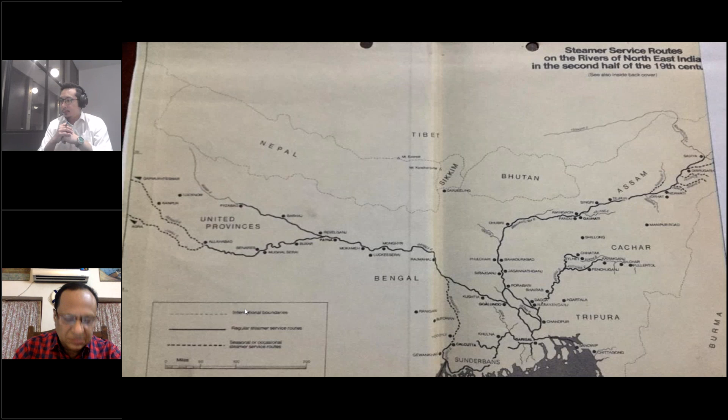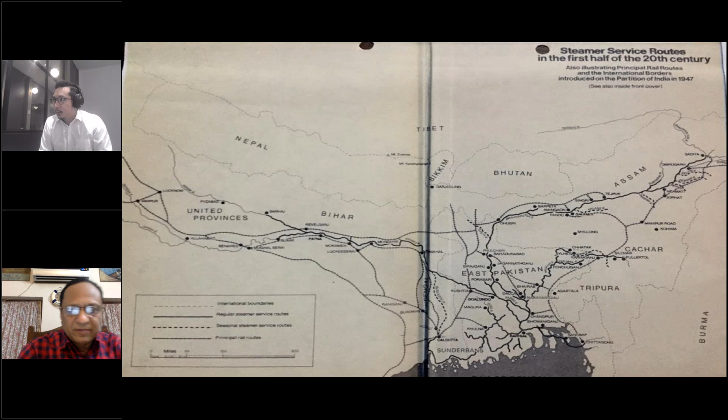Next slide, this is at the time of 1947 when India got independence. Here you can see the creation of East Pakistan, and also the railway lines network that had been laid. Thereafter, East Pakistan became Bangladesh.

In this slide you will see a photocopy of a fleet list of the two largest surviving companies of those times. One is India General Navigation and Railway Company Limited, IGNR, incorporated in 1844 at London. Second is River Steam Navigation Company Limited, incorporated in 1862 in London.

These two companies joined hands when times were not good, in 1899, and then came to be known as the Joint Steamer Companies. Later, in 1967, the Government of India took over and created CIWTC, the Central Inland Water Transport Corporation.

This is a page from the fleet list just to demonstrate. At that time these old companies together had about 1,200 barges and 12,000 men, one of the largest enterprises of its kind in the world, which was the golden period of IWT in India.

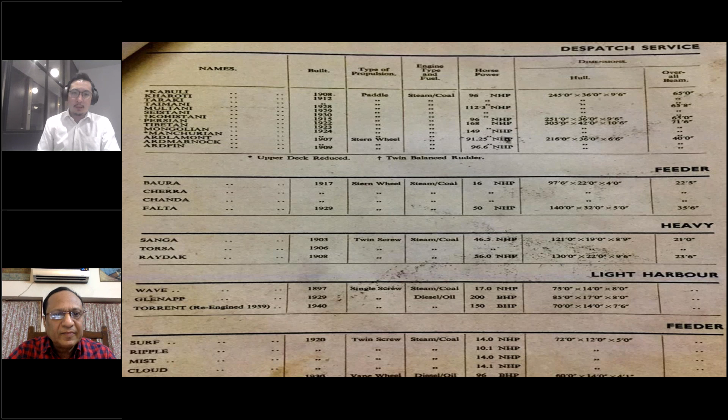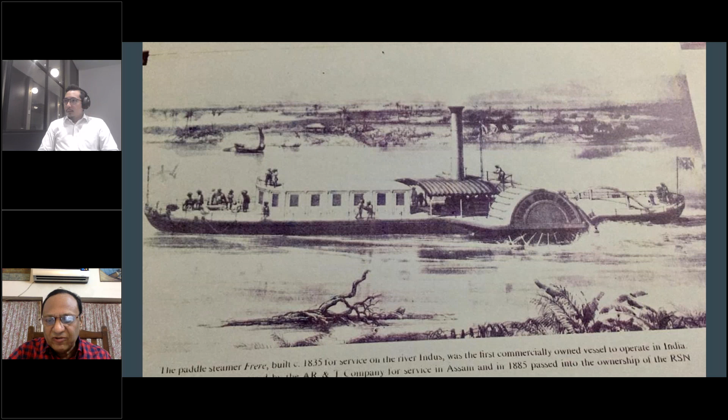This is one picture of a paddle steamer, Frere. It was built in 1835 for services on the river Indus and the Ganges.

It may be interesting to know that the port of Calcutta is a deep inland port about 150 kilometers from Sagar Island, set up in 1870, one year after the setting up of the Raja Bagan Dockyard, which was the IWT yard. Interestingly, if you see a plaque at Singapore port, it is written that they wanted to be like Calcutta port. This is probably the first time ever I have spoken 200 years of history in 2 minutes.

Okay, next, I am coming to this slide. This is the national waterways in India. There are basically 5 national waterways. National waterway number 1, NW1, is on the river Ganges and Yamuna. Number 2 is in Assam, on the river Brahmaputra. In between, Bangladesh is there, and now the waterways are connected also through Bangladesh.

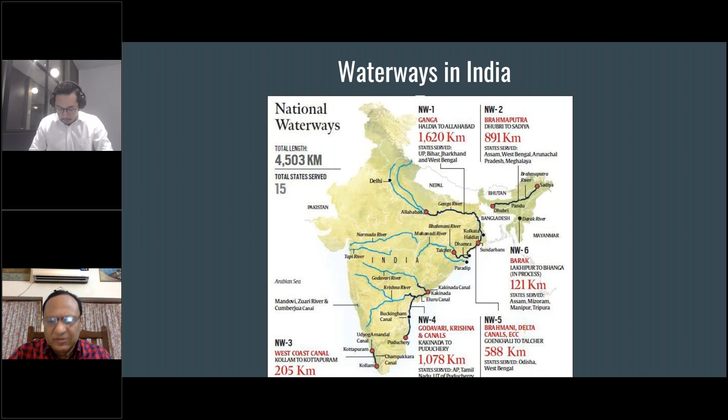Talking about the ports in India, there are 13 ports on the east coast, or maybe 14 — Dhamra is not showing here — and 32 on the western coast. The concentration of ports is mostly in Gujarat, that is the left side of your screen top, where various yard crafts are operating.

These are the tugs, water barges, oil barges, passenger ferries, etc. These yard crafts are designed as IWT vessels, therefore they come in the category of IWT barges. In addition to the above ports, there are two large naval dockyards: one in Visakhapatnam on the east coast, and the second on the west coast in Bombay. Each one has about 125 to 150 yard crafts.

Thereafter, on the waterway slide we have seen, there are passenger ferries and country boats, which are mechanized. I'll come to that later.

There are various acts in India. The first Inland Vessels Act, IV Act, was 1917, thereafter amended up to 2020. Then National Waterways Act 2016 — this act actually, there were five national waterways, and after that 106 have been added; this was only a declaration of waterways to be developed in future. Merchant Shipping Act was made in 1958, and there's also the Coasting Vessels Act. This is all related to IWT vessels and ships.

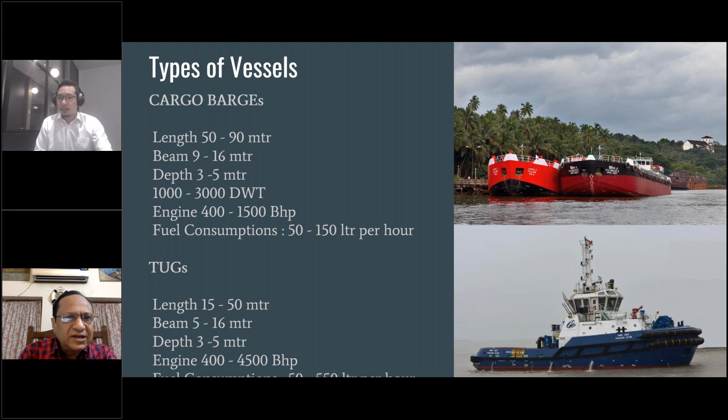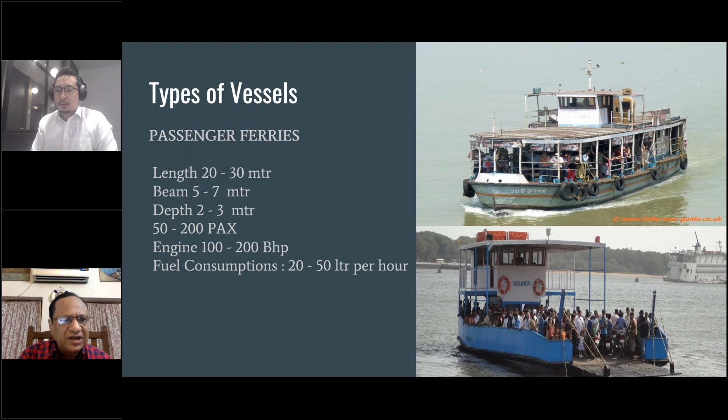So is Gujarat - there are various ports there: Kandla, Mundra, Jamnagar, Dahej, etc. Also in Maharashtra, Bombay, Ratnagiri, and other places we have seen. In Kerala, there is National Waterway number 3, but cargo barges are very few. Tugs are there, and passenger crafts are many, maybe more.

In Andhra Pradesh on the Godavari River, cargo barges as such - I don't think there is anything significant. There are a few tugs, and passenger crafts are mostly operating. These passenger crafts operate in the entire stretch of the rivers.

West Bengal has a large number of cargo barges. Initially they were small in number, and were also tug and barge combinations - two barges, 750 into 2, towed with a tug. Tugs are there in the port as well as the IWT sector, and passenger craft ferries, which I have shown as is.

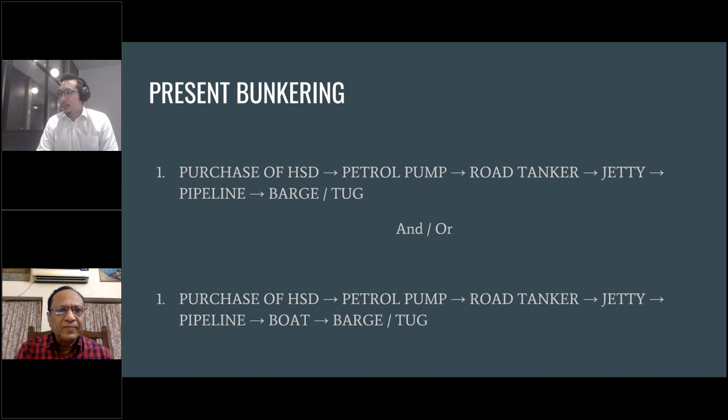Now this is another major area - major fishing harbors in India. There are a very large number of fishing harbors. There are 5 or maybe more - I'm talking about the large ones.

Total about 42 fishing harbors are there in 9 states, 4 on the east coast and 5 on the west coast. And a total fleet of about 200,000 fishing trawlers are there, from very small to good capacity, because they consume a lot of HSD all the time. They go to the ocean a couple of miles and then they catch the fish, school of fish.

Okay, my presentation does not end here. I will talk about a few points on methanol, though everybody is more knowledgeable than me because I am only talking about the IWT sector. But whatever little I know, I would like to share with the other participants who may not be knowing, or maybe knowing even. I'll just go through.

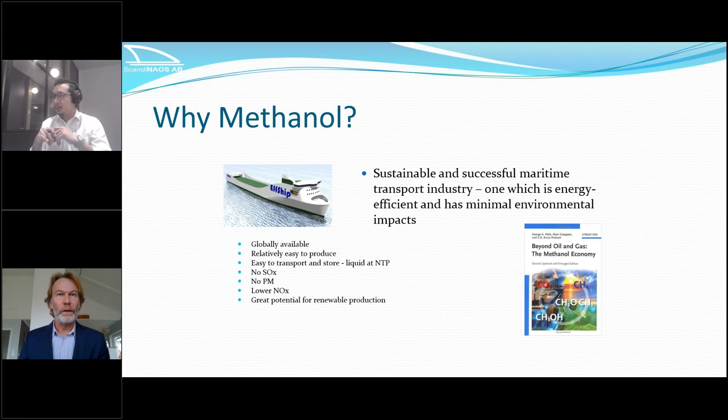Can we change slide there? Yeah, there we go. So I'm not going as far back as the 1800s, but we started this in 2009 with the EffShip project, and since then we've been involved in a number of projects.

In the EffShip project we had good partners at Stena and Stena Line, Lloyd's Register were there, and a number of other relevant companies. They shared our interest in methanol, and we then made some consecutive projects together with Stena. The first was the Stena Scanrail, where we tested some ideas, and that eventually brought us to the more significant conversion of Stena Germanica.

Stena Germanica at the time was the second largest RoPax vessel in the world, and we made that conversion starting in 2013, completed in 2015, where all the main engines were converted to methanol operation. At the time, Methanex also saw the benefits of this, and at a similar time they ordered a number of product tankers that would also operate on methanol.

The oil price has seen a lot of development - up to 2013 we had quite high oil prices. Unfortunately, I must say, oil prices dropped, which reduced interest in commercial applications for methanol. So instead of looking for the big commercial operators, we looked into the government and municipal-funded operations like road ferries and pilot boats, where we could see they need to be the driver to move into this more environmental and climate friendly fuel.

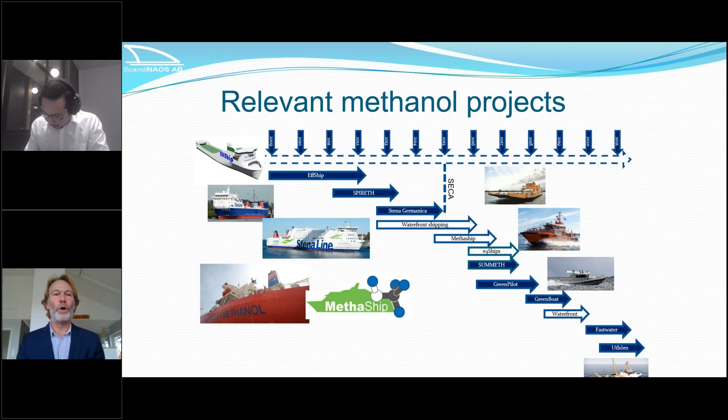So these are the projects we have done, and I'm happy to say we also now have a good portfolio of ongoing and future projects within Fastwater, which I think Sebastian will talk more about, and this Uthöm project, which I will get back to. Okay, next slide please.

This is the Stena Germanica. For this size of vessel, we are the naval architect, so we did everything except the engine conversion.

When it comes to methanol, it's a different fuel with different characteristics from fuel oil, so you have to do design changes or adoptions in order to take care of the specific characteristics of methanol. We have to have another type of fuel tanks. We cannot use the location of oil fuel tanks, but we can use ballast tanks for methanol. We need to have a separate pump room, and we need double wall piping. These are some of the details we have to take care of.

This is the first of a kind, so there was quite a lot of investigation into how to do it. It's not very complicated - if you know what you're doing, you can find solutions to this quite efficiently. The engine itself was a 4-stroke Wärtsilä engine, and Wärtsilä did that conversion.

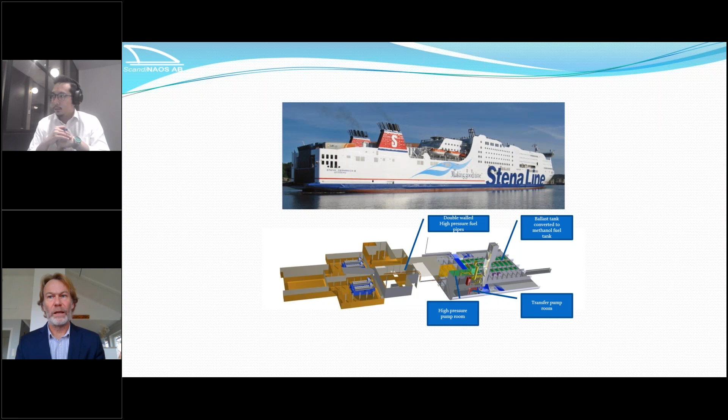This is the 4-stroke engine that Wärtsilä converted, the S40 engine, and methanol has different combustion characteristics than oil fuel.

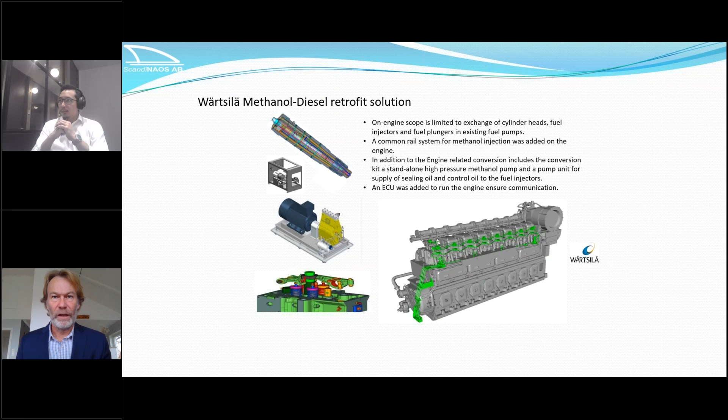It doesn't compression ignite as easily. It's more like an Otto fuel where you need some help to ignite it. There are different ways to do this - pilot fuel is one way, and introducing pilot fuel could be done in different ways. Wärtsilä has a very clever, ingenious fuel valve where you actually have both the methanol and the pilot fuel, or diesel fuel, in the same valve. So the conversion of the engine in principle meant we kept the diesel fuel system and added a common rail methanol fuel system, then combined the fuels in this fuel injector valve. A very nice way to do it.

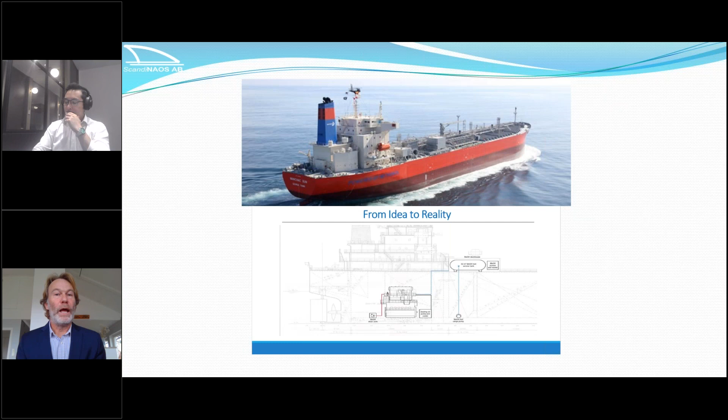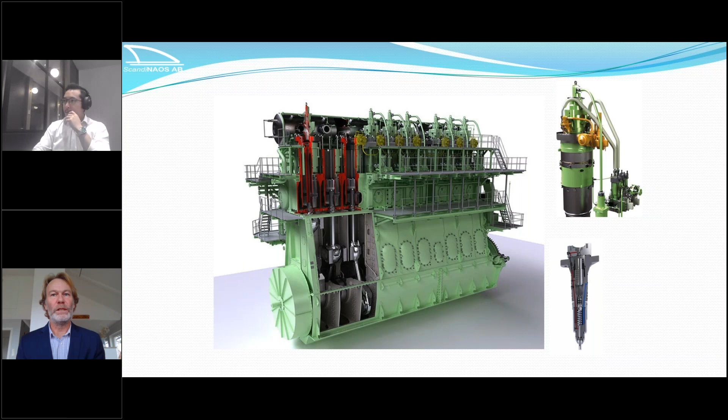Another concept for larger vessels is the 2-stroke engine, like the Methanex-ordered product tankers, where MAN delivered the methanol engine - a similar concept where you have both methanol and diesel combined in combustion in the cylinder. But the difference is, for a 2-stroke engine you have quite large cylinder heads, which means you can have separate injectors for the methanol and for the oil or diesel fuel, which makes things a little simpler in one way, or more complicated.

This engine is now ordered, it's in the brochure in the portfolio, and I think at this point 11 have been delivered and another 6 at least have been ordered for product tankers that would operate on methanol or diesel fuel.

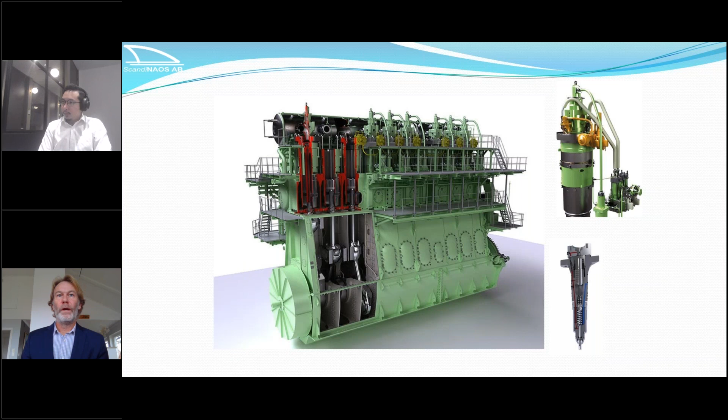From the Swedish Maritime Administration, we got this pilot boat - it's an aluminium vessel with 2 Cummins engines totaling over 1,000 horsepower. We executed that project where we tested methanol engines in this vessel. In principle, we replaced one of the diesel engines with a methanol engine. We tested 2 different types.

When you change fuel, you have to consider the characteristics of methanol. One key thing is that the flash point is 11 degrees, whereas normal marine fuel has a flash point of at least 60 degrees, and all the rules are shaped and set up for fuel with a flash point of 60 degrees or higher. So at 11 degrees, we have to do something. However, 11 degrees is not extremely low - we can compare it to gasoline, which is minus 40 degrees, and LNG at minus 188 degrees. So by opening up for LNG, we open up for all other kinds of low flash point fuel.

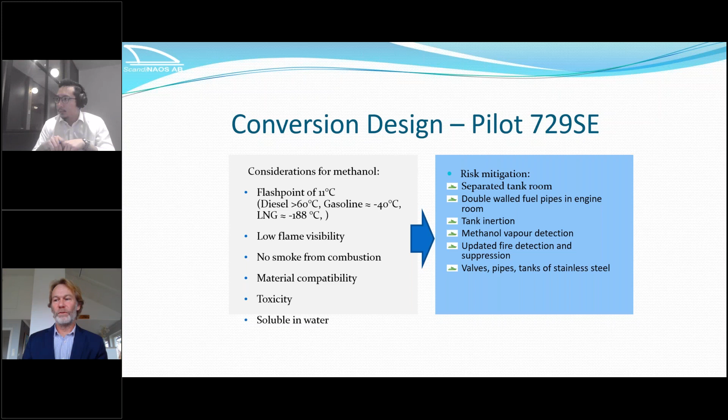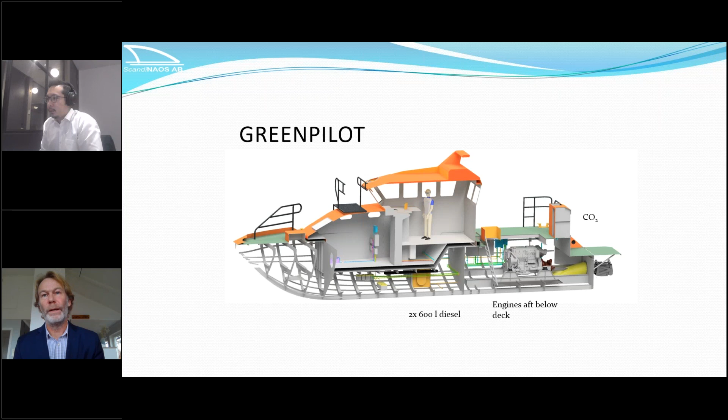So this is the Green Pilot. If you cut it in half, as it looked before we started to convert it, we have 2 times 600 liter diesel tanks, one engine each on starboard and port side, and a fire suppression system of carbon dioxide.

So what we did in this ship: we put in 2 new methanol tanks in a separate, gas-tight tank room. We fitted a gas-tight pump chest in the engine room with the filters and valves. We fitted double wall piping for the fuel piping all the way to the engine. We have gas sensors for leak detection, and a tank inertion system with an inert gas bottle on deck.

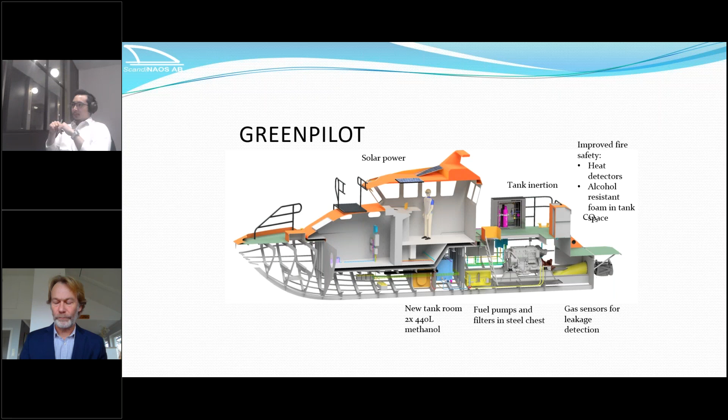For improved fire safety, we added heat detectors, and for the foam fire suppression system we had to replace the ordinary foam with alcohol-resistant foam. This is all straightforward, and if we take care of it, it's a very minor additional cost, I would say.

On deck, we added a dry disconnect bunker connection, meaning we will not have any spill. We have a pressurized fuel tank, so we need a PV valve. And as mentioned, we have a CO2 system which was actually oversized, so we could use the existing system.

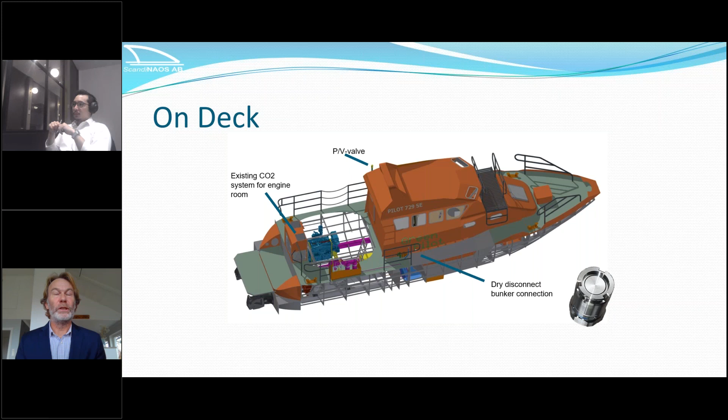Otherwise, comparing to diesel fires, to suppress a methanol fire you have to use more CO2, so you have to upgrade that system.

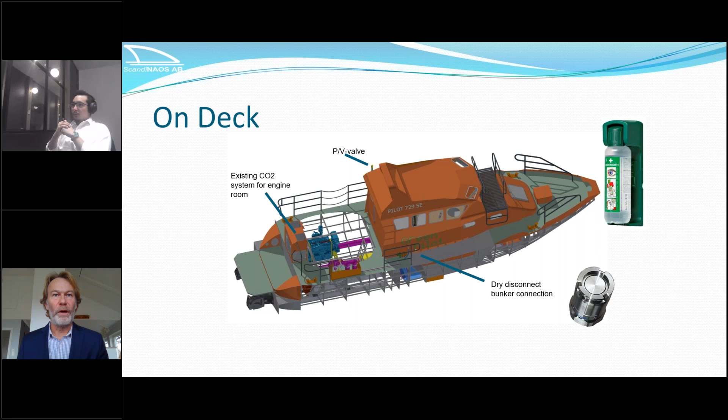There are some minor things, like an eye wash station, whenever you have methanol, because you have to consider the chance of a spray of methanol getting in the eyes. It's important to clean it as soon as possible.

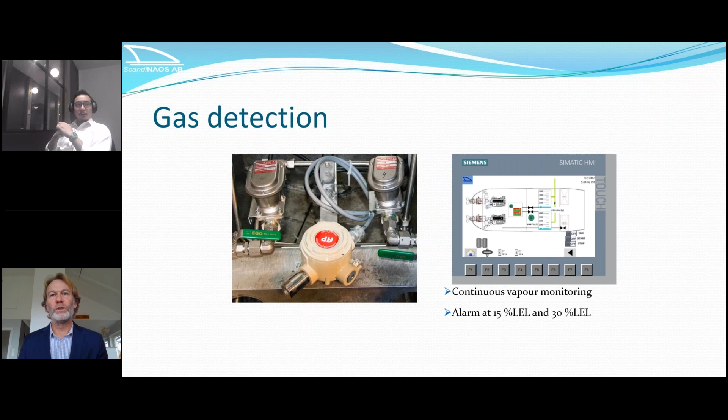Gas detection is one of the things we put in. It's quite straightforward and also a very good way to identify any leakages. In addition to the engine and piping system and inert gas, we provided a control system, including gas detection and all the controls with valves and fuel tanks in the ship.

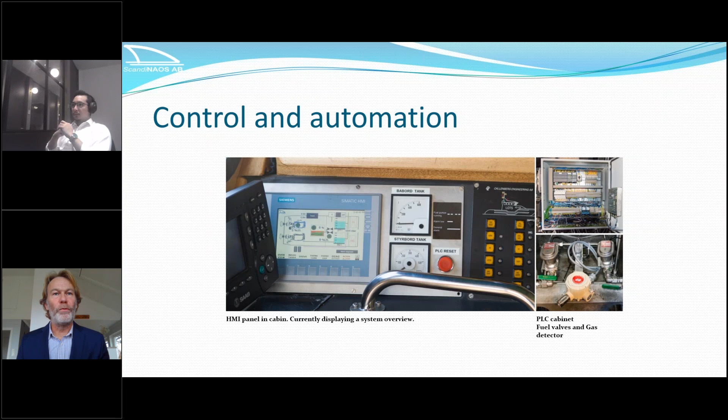So this was the scope of the Green Pilot vessel. It's a great project, and our experience is that everything works very well. We didn't actually have any problems with any of the systems.

We could realize that in certain conditions we have lower noise from methanol. We feel we took good care of material compatibility by providing the right quality for the piping and for the polymers and plastics. We had to replace some of the sealings, but we know where that is and can take care of it, so we don't see that as a problem.

We know it's easy to detect methanol leakage with a gas detection system. We came up with a simple bunker solution that worked really well. We don't actually see that an inert gas system is needed on this size of vessel. We have it on larger installations, but we think that's over-engineering. In this size, with small, limited volume tanks, we should not need a nitrogen inert gas system.

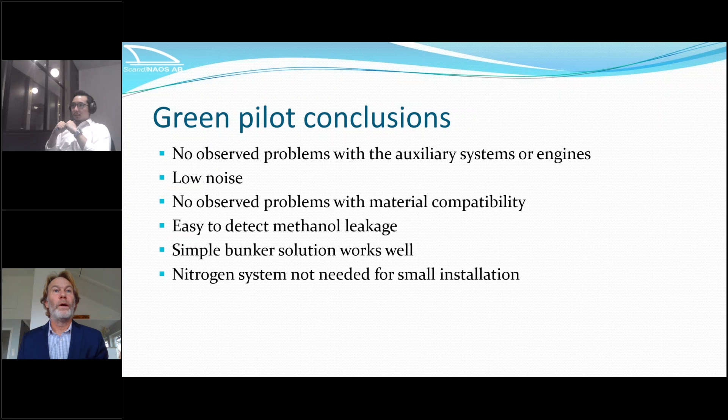So comparing what we did, let's compare two different engines. As mentioned before, methanol is an Otto fuel and works well with spark ignition engines, so that's the first engine we tested. We have good experience from that, and actually quite good fuel efficiency we could prove, but that's at high power output.

We also installed a compression ignited methanol engine. The way to make methanol compression ignite is to add an ignition improver and increase the compression ratio. So we took a Scania marine diesel engine and made those changes: changed the pistons, changed the injectors, and changed the control system.

This compression ignited methanol engine is really the one we prefer, because you have very good driving performance, identical to a diesel engine, and high efficiency both on high loads and on part loads.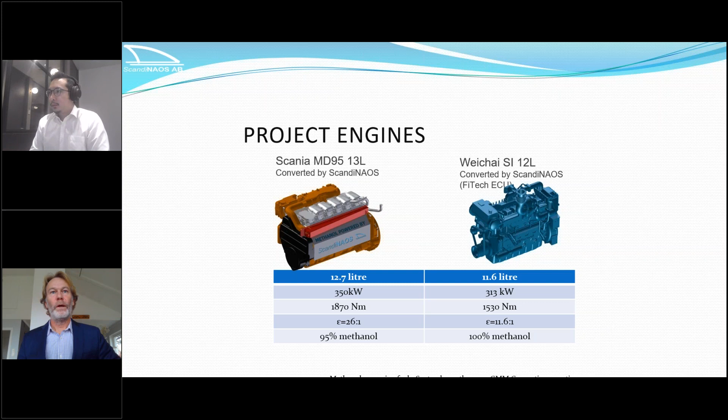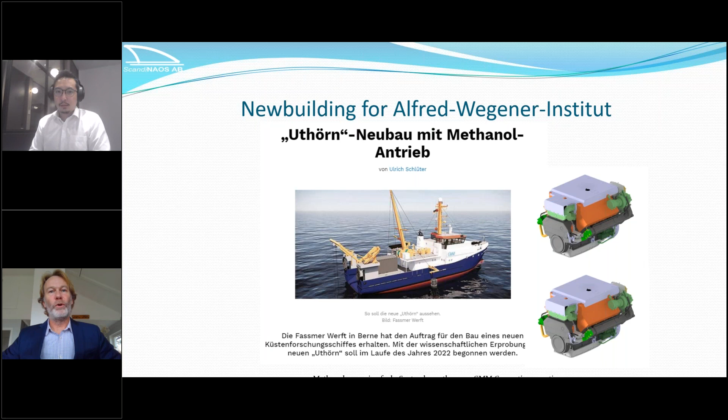All this experience we got both from the green pilot vessel, we are now putting into this Uthörn. It's a German research vessel from the Alfred Wegener Institute, ordered by the Alfred Wegener Institute, will be built at Fassmer shipyard, and will be fitted with two V8 Scania converted methanol engines.

When it comes to what we have seen and done in India, we have actually been involved quite heavily, and we have far developed projects together with Indian authorities, with the Niti Aayog, with the Inland Waterways Authority of India, and together with Cochin Shipyard, plans to have demonstrators to show the benefits of methanol.

We acknowledge that there is a push in India to change to methanol for transportation fuel in all transport sectors, and we can see that we can contribute in the marine sector, particularly for the inland waterways, where we understand the ambition is to increase utilization. I think now they contribute 3% of the total transport work, and the target is 15%. That would mean a lot of new inland waterway vessels will need to be ordered and built, and that of course should be done with a clean fuel that could be domestically produced in India.

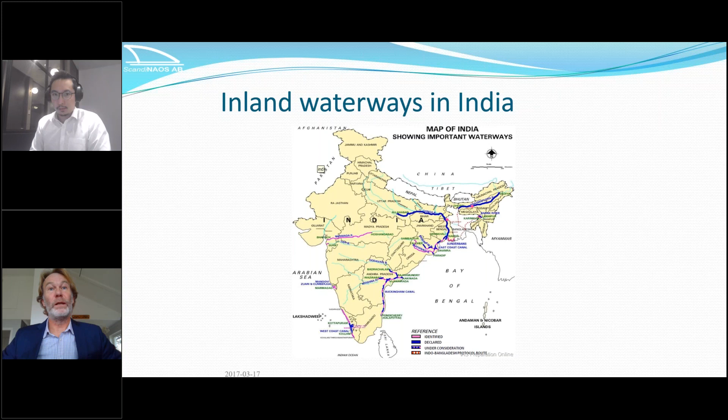This is the type of vessel where we see that we can provide both the design, the system design, and also the engines. So what we now have in our portfolio is the Scania brand. We have the Scania portfolio of engines from 175 kilowatts up to the V8 that gives 450 kilowatts, and we can deliver those both as propulsion engine and genset engines. And if you hurry up, I think we can squeeze in the order and get you an engine before Christmas.

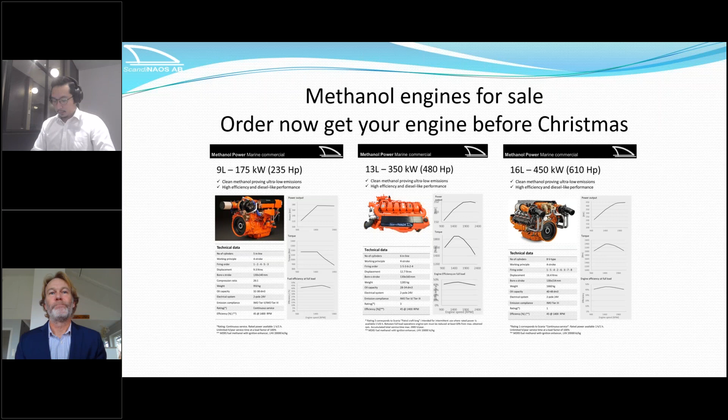And with that, I say thank you very much for your attention.

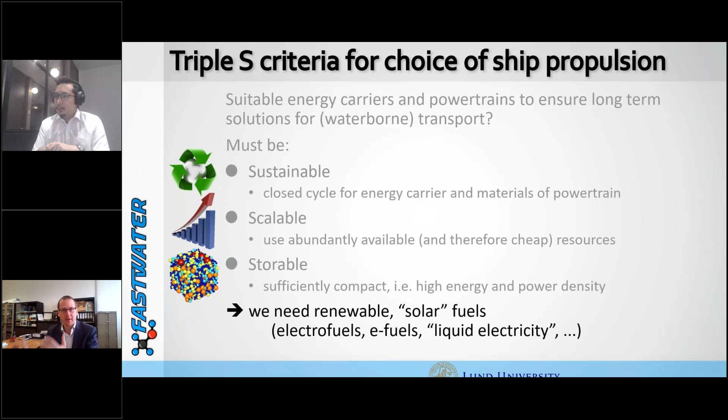So if you combine these 3 criteria, I believe a very logical conclusion, first of all, is that we will always have a need for fuels. Whereas, for instance, for passenger cars, maybe we can go a long way with electrification, for something like waterborne transport, we really need the energy density of fuels. So that's a given. And where do those fuels have to come from in the end? Of course, in the long run, we must be able to make them in a renewable way. So you could call them solar fuels or e-fuels, electrofuels, whatever you want. We have to go from renewables such as wind and solar and bio into something that we can use actually to power our fleets out there.

So this is sort of the summary of the project core idea of the FASTWATER project. This idea that we can produce methanol in the long run, starting from renewably produced hydrogen. So where we start from a renewable electricity form, whether it comes from solar or from wind, for instance, that we electrolyze water so that we can store the electricity when we have an abundance of renewable energy sources in the form of hydrogen, because that's easier to store than renewable electricity. But it's still a difficult thing to store, hence the necessary additional step to something that makes it liquid at normal temperature and pressure.

So basically, the way I always explain this, why methanol? Because it's just the simplest thing that you can make that is liquid at atmospheric conditions. So it's a carrier, or something to carry around hydrogen. And the most compact way of doing that is by actually having a carbon bond in there. So that's the important bit.

Sometimes people criticize methanol by saying, well, there's carbon in there, we have to get rid of carbon. No, we don't want to get rid of carbon. We want to get rid of adding additional carbon to the atmosphere. So as long as we set up net zero carbon emissions, then we're in the clear. And having a carbon bond in there greatly helps with energy density, with ending up with a very practical fuel, a fuel that can then be used to power marine transportation.

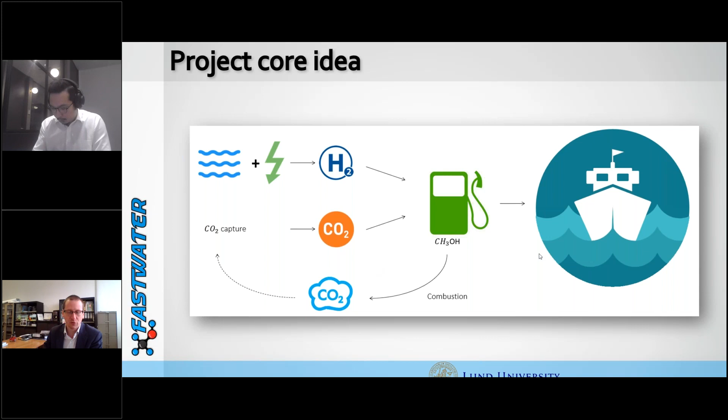So as already mentioned by Bengt, there's been quite a lot of experience by now with methanol as a marine fuel. And at the onset, when we were writing this project proposal, we studied what was already out there to try to understand what are the remaining bottlenecks.

There are actually three main challenges that we want to tackle by the project. The first one, very practically, is the availability of engines. We heard the Stena Germanica mentioned, so that has a medium speed engine, but that's not a commercially available engine currently. The only commercially available engines when we started writing the project were the huge two-stroke engines by MAN, which is absolutely great that they're out there, but of course they can only be used for really big ships.

We have many more applications in waterborne, so what we were looking for was the power range between 100 kilowatts to 10 megawatts. That covers a huge amount of applications in waterborne, and that's where we wanted to work on engine technology and on getting these things into the markets. We'll come back to that in a minute.

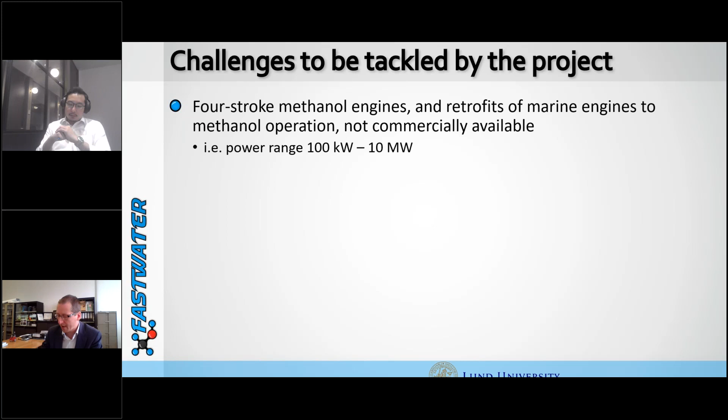The second point was that in the long run, we need to make sure that we land with renewable methanol. It's also very necessary to demonstrate this full chain, from producing renewable methanol up to distributing it, being able to bunker it on board ships, and then ships actually sailing on this renewable methanol. So that was a second point of attention - can we demonstrate this entire chain?

And then a third point, also really important, of course, these things need to be approved. So you have to look into rules and regulations that you have to tackle before you can actually not just demonstrate, but definitely commercialize these solutions. And so there are some rules and regulations out there.

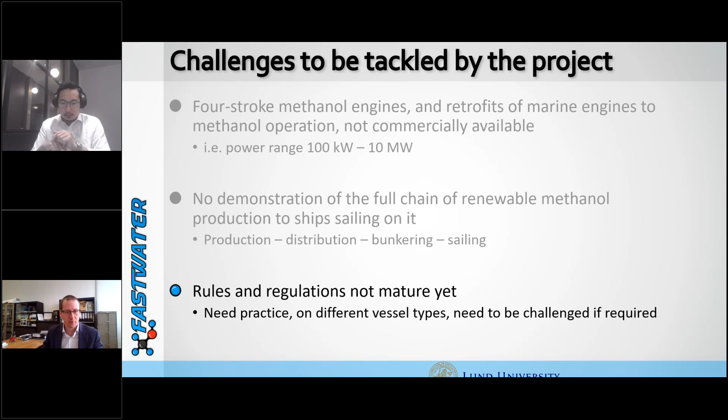Mostly they have been based on LNG, for instance, which just makes life a bit difficult now, not undoable. It's perfectly doable, but we had the feeling some things are probably way too strict for methanol, and we could make life a bit easier, lower the thresholds for people trying out methanol by challenging some of these overly strict rules. So that's also something that we want to check during the project, if there's any possibility to simplify procedures.

So how are we going to address these challenges? First point, availability of engines - here you see three of the engines that we're targeting within this project. The big picture shows a medium speed engine from Anglo-Belgian Corporation, a small ship engine manufacturer. They're going to commercialize a dual fuel version of this engine.

So the bulk of the energy is produced by methanol, with the methanol being injected into the ports, the intake ports, so that we can also devise retrofit solutions, and then being ignited by a pilot of diesel fuel. At the top right is a Scania engine.

So what Bengt from ScandiNAOS was just explaining, this MD95 concept, where you have a single fuel solution, methanol with ignition enhancer mixed into it, that you can use in a pure compression ignition solution. So that's, as you've just heard, also being commercialized.

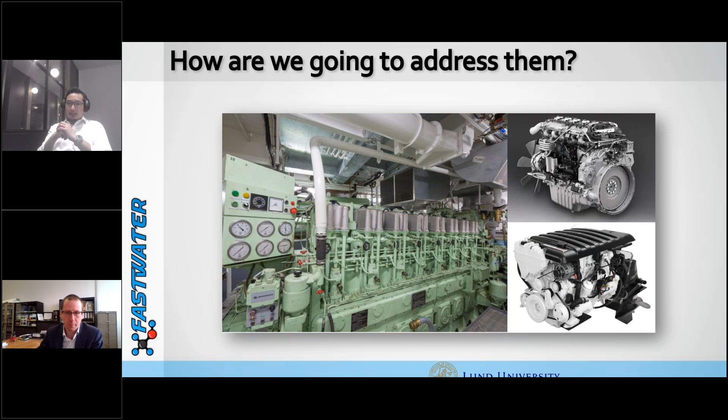And then at the bottom right is a smaller size, 200 kilowatt high-speed engine, a Mercury engine that's going to be retrofitted with a dual fuel retrofit system, because that's one of the things that we also clearly want to demonstrate - that existing ships can be retrofitted to methanol operation. There's a huge amount of ships out there, so if we can make those green, if we can make those less polluting, that's one of the ways to go.

The other part, the demonstration of the whole chain of renewable methanol production to its use as a marine fuel, as well as challenging the rules and regulations, we felt that the best way to tackle those is to have some real life demonstrators out there.

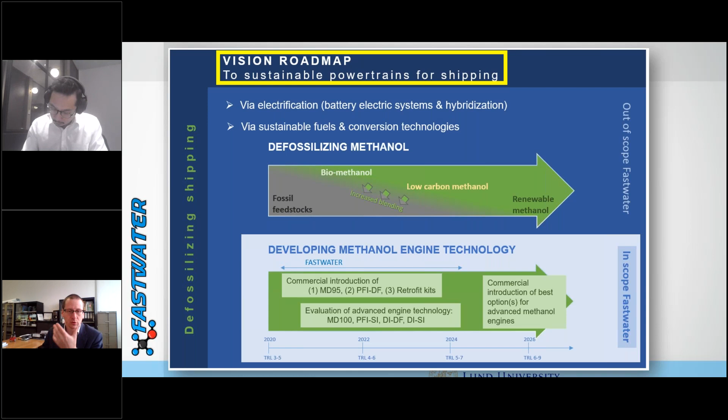So how has this been translated into the general long-term strategy that we envisage? First of all, what we're setting out to do is defossilize shipping, and what we're mostly focusing on is these demonstrators. That also means a number of things are out of scope of the FastWater project, like electrification or other fuels.

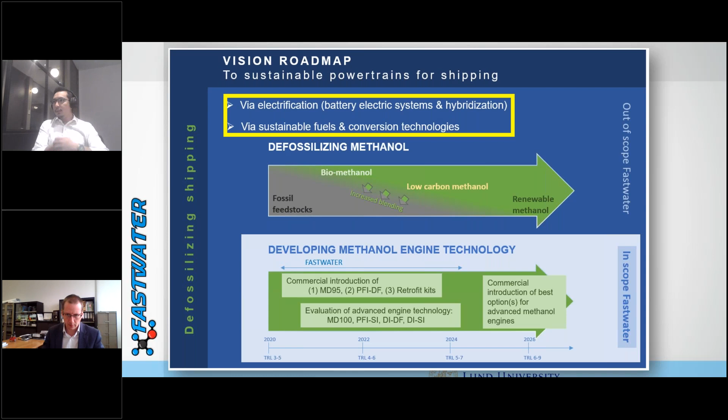What we want to focus on is methanol. We won't do any work directly ourselves on methanol production, but I'll explain in a minute how we make sure we have that link to what is going on with methanol production.

What we want to demonstrate is this pathway from methanol currently mostly being based on fossil feedstocks, natural gas or coal, depending on where you are, with biomethanol slowly becoming available. We see demonstration projects and pilot plants set up to produce low carbon methanol, starting from renewably produced hydrogen combined with a waste stream with carbon content, such as exhaust stacks from a power plant, eventually leading to renewable methanol.

The great thing is that renewable methanol and fossil-based methanol are exactly the same molecule, so we can blend these and increase the share of green methanol in the fuel pool. At the heart of our project is tackling this first challenge of developing methanol engine technology.

On one hand we have demonstrators geared at demonstrating relatively easy technology to introduce, so we can come to a commercial introduction. We've talked about MD95, and dual fuel technology using port fuel injection so we can commercialize retrofit kits. In parallel, we're supporting that work with a more research-oriented work package looking into advanced engine technologies.

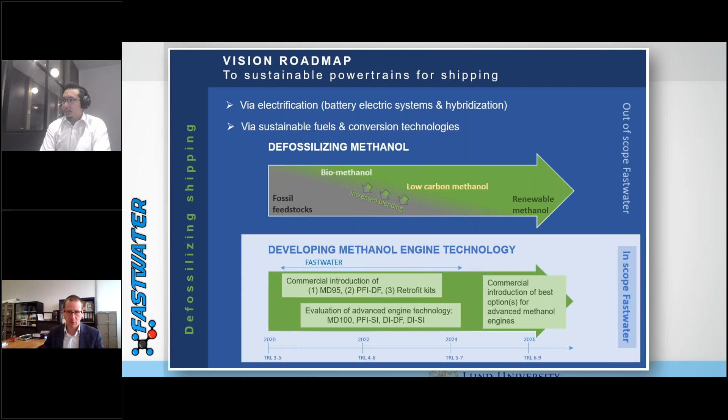Where is this going to lead us to? So the way we've organized the project is shown here - the overall work package structure. The core of the project is these demonstrators: the harbor tug in Belgium, the pilot boat in Sweden, the Coast Guard vessel in Greece, and the river cruise ship concept by a German shipyard. I'll name the partners in a minute.

These are relying on methanol engine solutions, so there we will make sure we have commercial introductions and can offer retrofit packages. Next to engines, there's a lot of other things to organize - we need to take care of fuel logistics, look into standards, acknowledge safety differences with these fuels compared to today, and work on training packages for both onshore and ship crew.

We're supporting that with a work package on next generation engines - what do we learn from the experience gathered during the demonstrations that leads us to the next type of engines making even better use of methanol's properties. And at the end, we want to make a real business out of this - our industrial partners see a lot of potential here in methanol as a marine fuel.

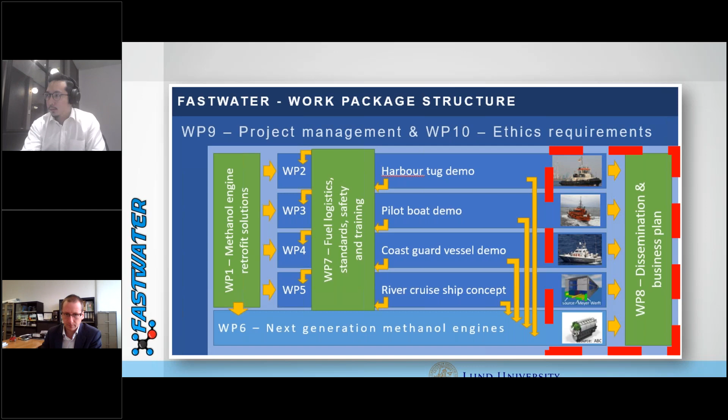Just to give you a quick idea, we've just started on the 1st of June, so we're now busy developing all the technology and plans for the demonstrators, so that about a year from now we can actually...

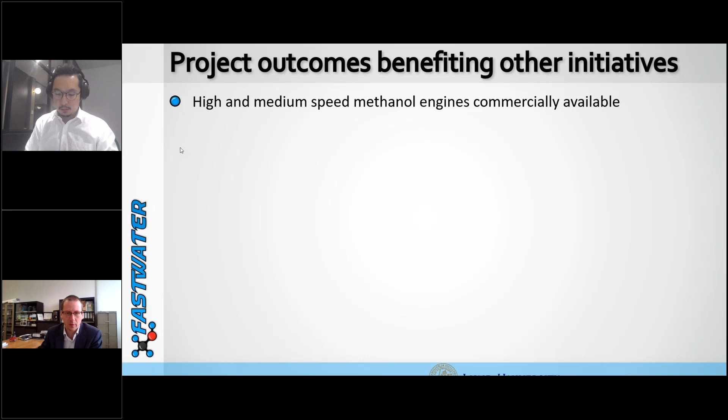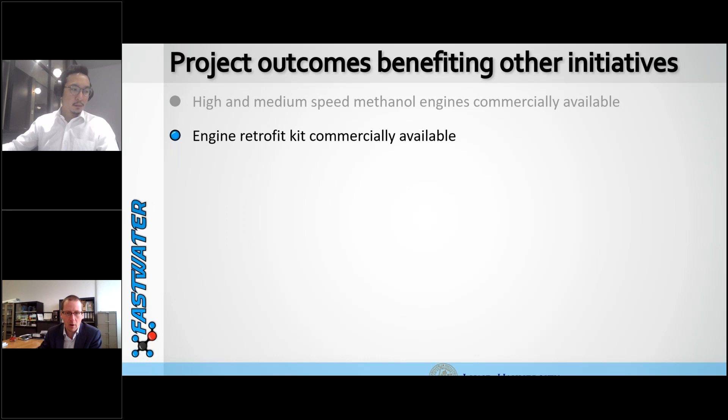And the next one is the retrofit kit. That's on the same level. Can we convert existing ships, or a ship that's up for refurbishment, how can we go to a greener solution? There's not too many options out there, so hopefully within a short period, or halfway during this project, that will become feasible.

I think very importantly, something voiced by all our project partners, is that there's a real need for real life demonstrators. There's some out there, but we really need to expand that portfolio. Being able to guide people around the ship, see how it actually looks in practice, see that it isn't rocket science, that it is very achievable, we hope will help generate a lot of interest and get this picked up.

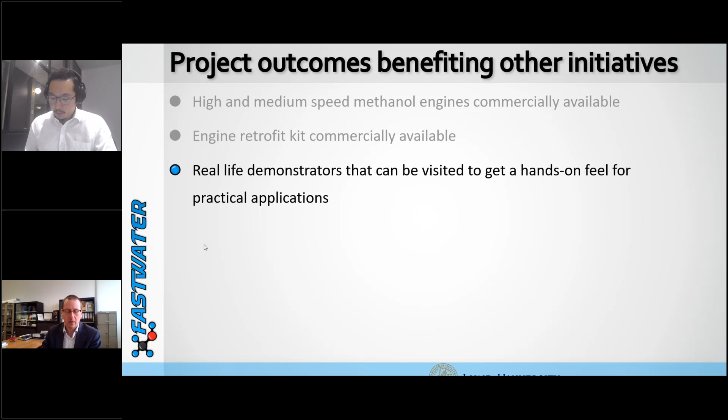I also mentioned we're going to develop training materials. That already exists for some ships, like the big two-stroke engine-equipped waterfront methanol tankers, for instance. Of course, they needed to be able to train the crew, and so we want to translate that experience to other types of ships, and also make sure that material becomes available to as many people as possible. We also mentioned the rules and regulations.

There we think that we can probably lower the thresholds by getting rid of some things that are either very geared towards LNG, which has completely different properties than methanol, being a cryogenically stored liquefied gas - that's quite different from methanol. On the other hand, we also feel that a lot of these rules and regulations are really targeted at very big ships, whereas there's tons of small workboats, for instance, where it would be undoable to apply these same types of rules and regulations.

And the next one, we want to demonstrate this complete supply chain so that we don't just show that we convert a ship, but we can actually also make sure that it gets regularly serviced, that it gets supplied with renewable methanol, depending, of course, on the interests. Maybe that's something I need to take a minute for as well - our long-term aim, obviously, is to be able to transition to renewable methanol.